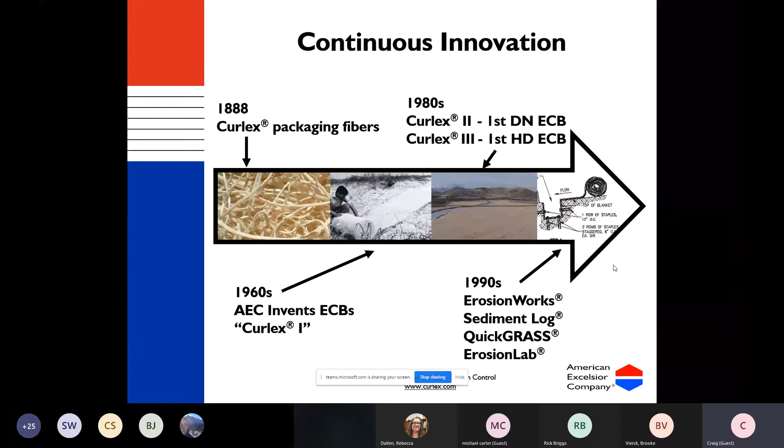We came out with Erosionworks, a free design software you can download on our website to help you make decisions about what works best in your application on slopes or in channels. We invented the sediment log, which we'll talk a lot about today, Quick Grass, our green pigmented product, and we built the Erosion Lab, the facility I run in Rice Lake, Wisconsin.

In the 2000s, we developed a new turf reinforcement mat, or TRM, called RecycleX. We don't talk a lot about that today, but it's interesting in that all of those green fibers are post-consumer waste, made from pop bottles, and they don't float, which is a really interesting characteristic for turf reinforcement mats. We invented our net-free product, the only net-free blanket of its type, and we came out with our e-staples, a biodegradable staple product.

In 2012, we came out with Curlex Blocs. This is another product we're going to talk about today. These were initially invented as an American-made alternative to coir logs for stream bank and lake bank restorations and filtering.

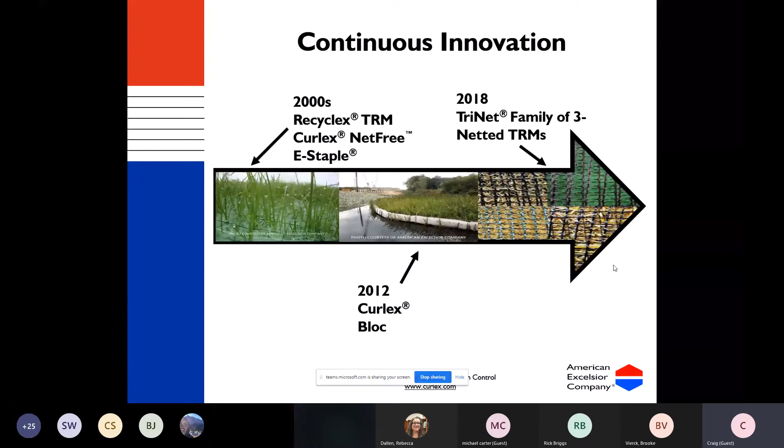And then most recently, in the 2018 timeframe, we came out with our newest group of turf reinforcement mats, called TriNet.

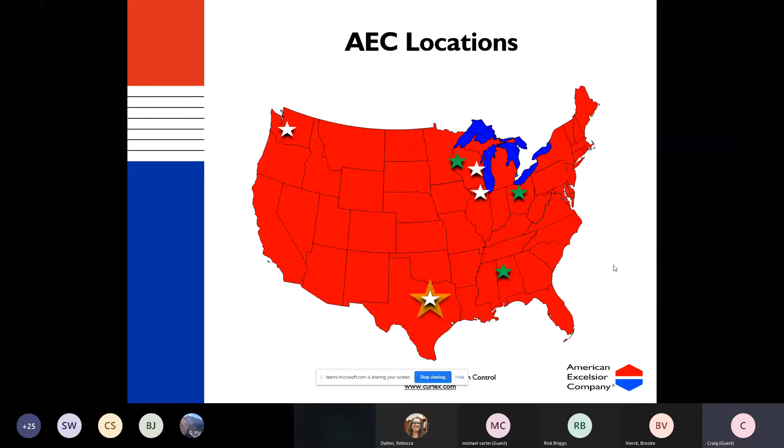So a little bit about us. I won't bore you with all the details of where we are, but our world headquarters is in Arlington, and you'll see some different stars on the map. The green stars are all erosion sediment control product manufacturing in Alabama, Michigan, and Wisconsin. Also, the facility I run is in Rice Lake, Wisconsin, and we have some other facilities there for other parts of our company. But needless to say, we're pretty diverse and have a lot of years of experience.

Well, this is where I'm lucky enough to work and spend most of my days. My friends ask me what I do for a living, and I say, well, sometimes I'm giving webinars and training, and other times I'm playing in the dirt.

At the lab, we do large-scale ASTM performance testing, research and development, contracted testing, and lots of what we do there now is what I'm in charge of: industry education seminars and internal and external training.

We always invite people if they're ever in the area. We host a lot of events up here, especially in the summertime. And this year, though we haven't hosted one yet, we're actually making plans to host again, as most people didn't last year. But it's a great, great facility.

Those are for rain simulation. We can simulate 2, 4, and 6 inch per hour rain events that simulate real rainfall, where the raindrops reach terminal velocity and have the correct distribution and size and cover. So a lot of what we'll talk about in sediment control and erosion control comes from those.

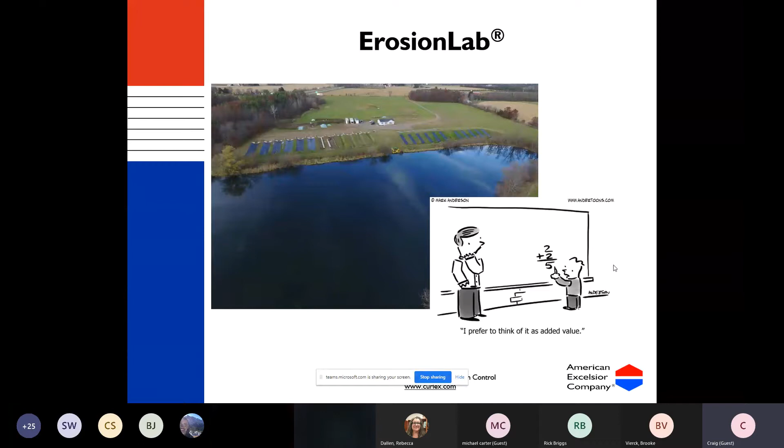And I share that, again, not as a commercial, but to let you know that we take this really, really seriously, and we try very hard to give presentations and participate in events that make our industry better. If you ever have questions or comments or want to visit, please do not hesitate to reach out to us. We'd love to have you at the facility. And as someone was saying at the beginning, it's nice to see people in person again.

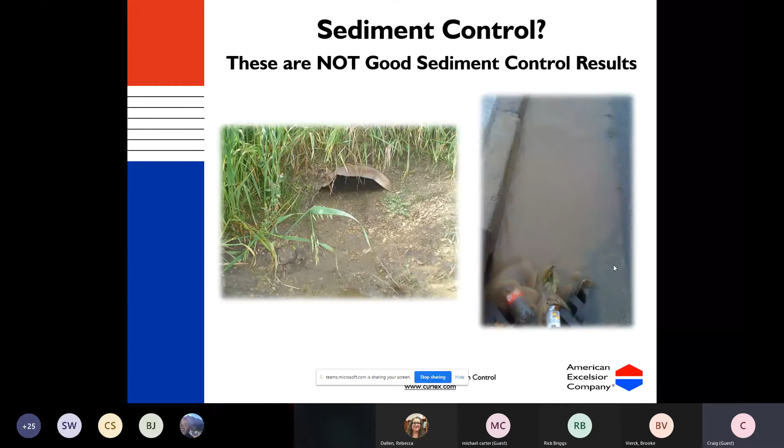And that's a lot of what we're going to talk about today. Specifically, when you put a product in these situations, whether it dams or filters the water, why does that matter? Hopefully you'll find some value in that.

So obviously there were bale checks upstream of this - you can't see them in this picture, but just up there were some bale checks, and they frankly weren't doing their job. But that's not because bale checks are inherently bad; it's just that they don't filter water. The sediment-laden water and any other pollutants come right down the stream, whether it's sediment or trash, there's a pollutant.

So what I talk about today isn't really a good or bad thing. It's just how these products perform differently, and how if you use the right best management practice, or BMP, for the right application and install it correctly, it'll generally work. But we shouldn't lump them all together and assume that just because they have a similar look, they perform in a similar manner.

You probably all know this, but I always like to say some of these basic things at the beginning. People talk about erosion and sediment control very quickly and just move past it. What we want to talk about today, though it doesn't necessarily pertain directly to your floatables, is that erosion control prevents the need for as much sediment control. Preventing the soil from breaking away in the first place minimizes the need to capture it when it breaks away.

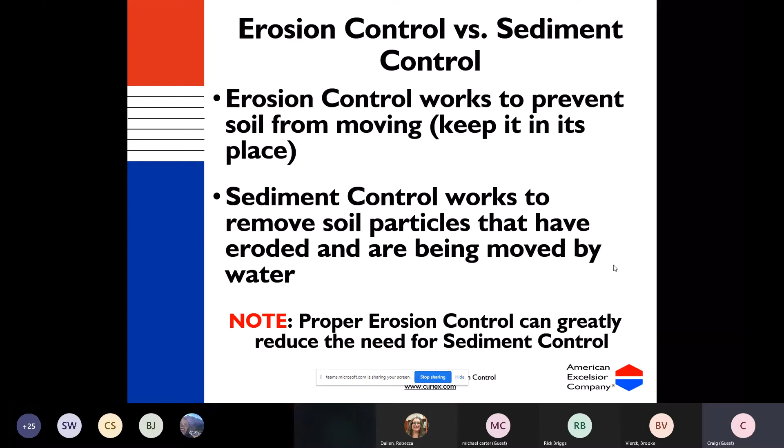So erosion control is keeping the dirt in its place, and sediment control is what we're doing to remove those soil particles that have eroded away. Basic stuff, but it's something to keep in mind.

Doing things correctly, installing some products - even if it wasn't time for erosion control, installing some sediment control products - would have caused this to look a lot different. Doesn't mean you wouldn't have had any, but we could have kept all of that trash and most, if not all, of that soil out of that ditch from clogging that pipe.

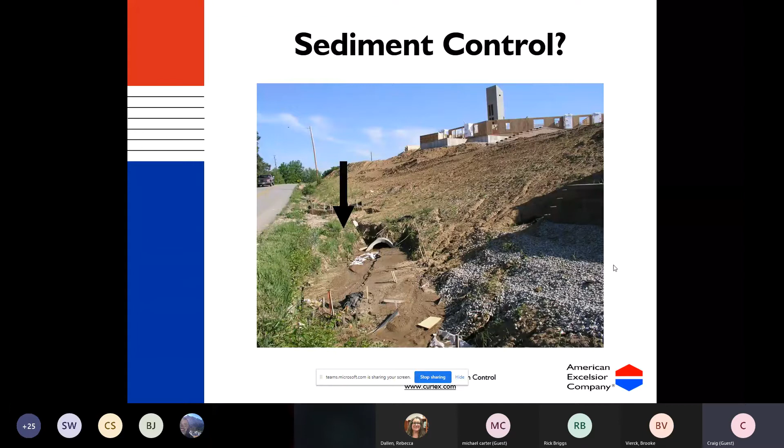So this isn't a question you have to answer out loud, but a lot of the rest of this presentation is going to talk about densities of products and whether something dams water or filters water. What I want you to consider is, does the density of a sediment control product or device affect how it performs? And the answer is yes. But why does it matter? This is what we're going to talk about.

Why does something that looks very similar - it's a tubular shaped product for instance, 12 inches in diameter - why does it matter what's inside of it? And why does it matter whether it dams the water or filters the water? And then what does that mean for you all when you're talking about waste, not only blowable trash, but the other contaminants that are coming along with that water?

So when we talk about filtering and damming products, just as a reference, we classify filtering products as those that have a flow rate of 35 gallons per minute per square foot or more. So they allow at least that much water to flow through their matrices, and they're providing some velocity dissipation when that flow rate's exceeded, and they also are capturing some sediment and waste and so forth within their matrices in many conditions. Damming products are not that, obviously. So they have a flow rate of less than 35 gallons per minute, and they're designed to pool water.

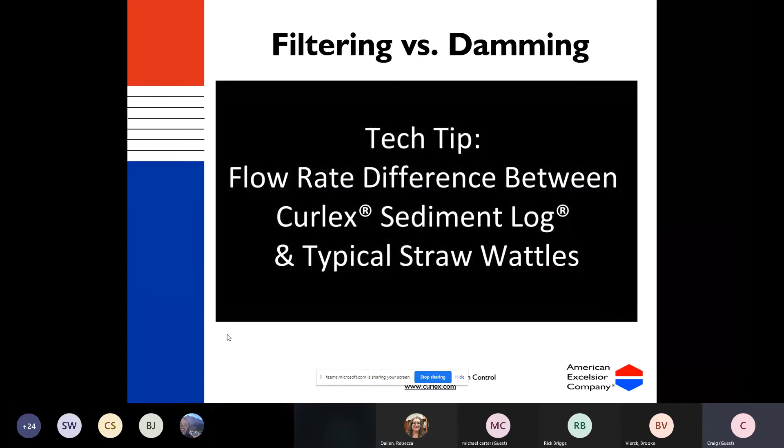So these have different end results, right? They're both looking in the sediment control world at keeping sediment under control, but they do it in very different ways. And we think there are ways that are better than others. So the world's simplest video, I just want you to look at what happens to the water when it's poured over these two products. We make both of these products. One of them is a straw wattle that I'm sure you've seen, and the other is our Curlex sediment log. So the sediment log is a filtering product, and the wattle is a damming product.

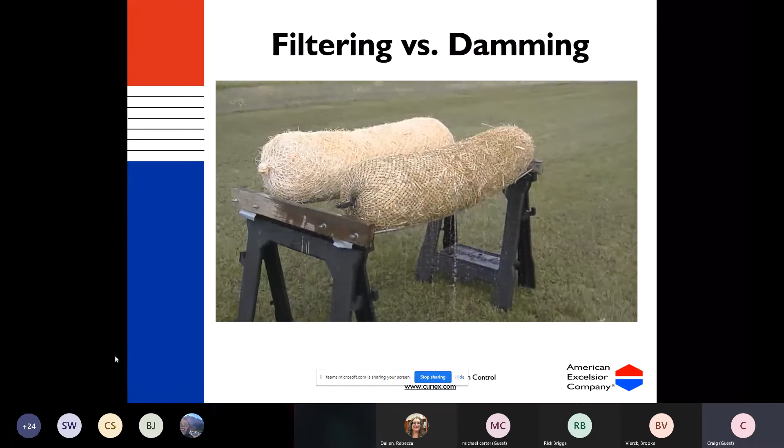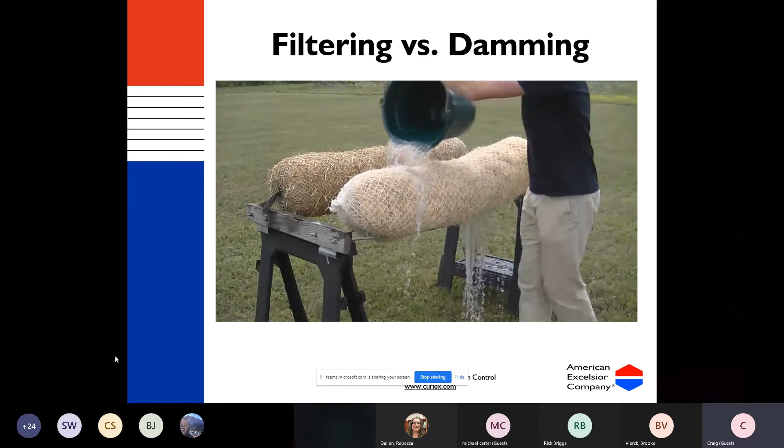So here the water goes off the sides of it. It doesn't flow through it. So these would dam the water. Same dimensions here, and see how the water flows through it. You say, well, who cares, Craig? Why does that matter? So that's what we're going to talk about next. And I think it can have some positive impacts on not only the regular sediment that you would consider the traditional dirt in your runoff, but I think it could also help with some of the trash and blowables that you all run into.

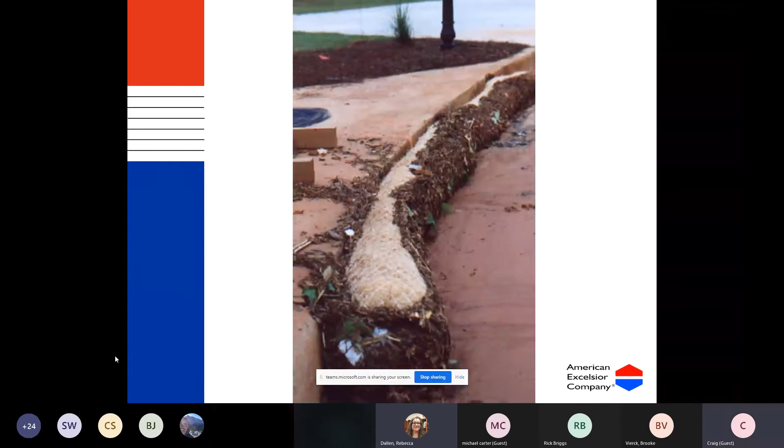Craig, we do have one question. Sure, absolutely. Michael asked this question about 2 minutes ago, so it may have been the previous slide. He says, what is the surface area being measured? So it's a square footage. If you're talking about the square foot of a product, it's how many square feet it is. Obviously, with the product it's the whole circumference. So it's the whole surface area of the device. I hope that answers the question. I'm assuming he means how much flow goes through it. So obviously a smaller diameter product is going to have more linear feet to get to a square footage than a larger diameter product. I hope that answers the question.

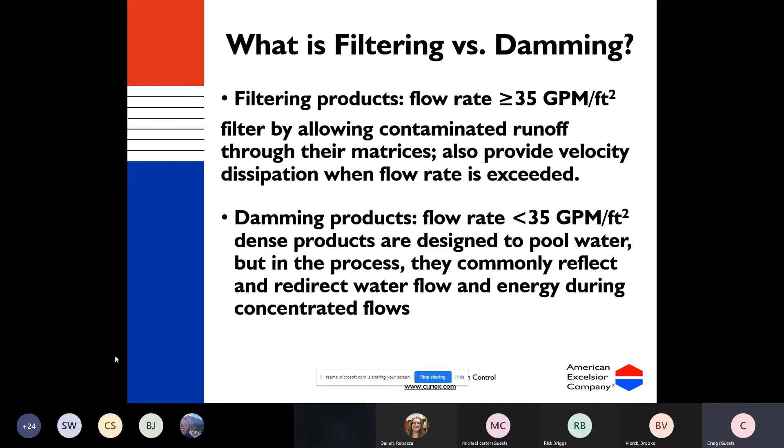He says, yes, thanks. Oh, okay. I'm not an engineer, so sometimes I try to answer and that doesn't always come out exactly how I want, but generally speaking, that's what we're talking about. Anything else? Not at this time.

Thank you. Okay, great. So as I said earlier, much of this presentation normally focuses on how filtering and damming products perform differently.

Often a log or a wattle or whatever's used, they're used with no regards to whether they dam or they filter the water, as I mentioned. And what I want you to get from today is just because two products look the same doesn't mean they perform the same. So in short, what this presentation will talk about more as we go through is how in many instances damming products are used.

And again, we make damming products. We make lots of different products. So we're not picking on a brand or anything like that. What we're trying to say is there's often, we think, opportunities for a filtering product to be used where historically a damming product can be used. So that leads us to this research.

Auburn University, as they're continuing to do, I should really update this, they're continuing to do a lot of research on this. And they talk a lot about the ditch checks commonly used on construction sites. They discovered that the inclusion of an underlay fabric reduced the potential for scour underneath the practice, thereby maintaining the interface between the practice and the channel.

And their data confirms that the dense damming products can be successful in large-scale testing conditions by creating those longer subcritical flow areas. And like I said, we're not picking on a product. We're not trying to pick on a brand. We're just saying that there are damming and there are filtering designs. And we think that damming products are often used when really the goal would imply that a filtering product would be better.

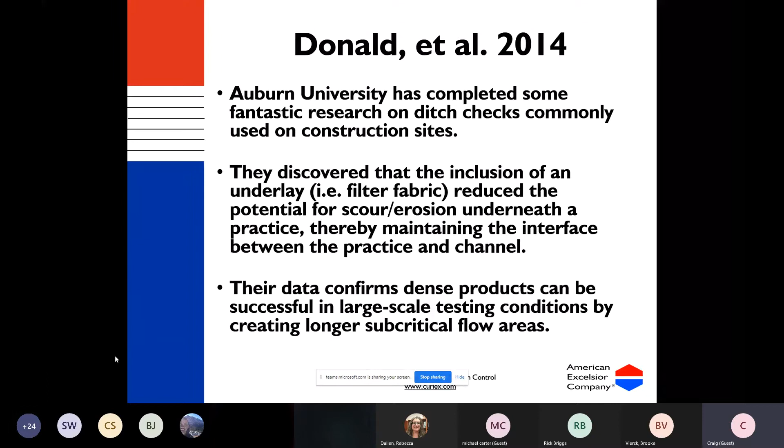So a lot of this data, again, gets back to generally, I would say, the traditional sediment control of dirt, soil particles that have broken away, which doesn't exactly get into what we're talking about with trash and blowables. But I do think it impacts how it ends up in the real world and how it ends up moving or not moving that waste around your job site.

So why do you use a damming product? Mother Nature handles natural stream erosion through a series of pools and riffles that we talked about a minute ago. The erosion commonly occurs in those faster moving water in the riffles, but the particles settle out in the deeper, slower pools that follow those riffles. So damming products are used to mimic this concept.

As I mentioned, just like it was in the street, the water hits the damming device, it blocks it up in that picture we showed a minute ago, and it pools up the water out into the street. Well, what that does is it protects the inlet, but the reason it's protecting the inlet is it's stopping all of it. It's not necessarily filtering it, and theoretically and hopefully it falls out in the street and doesn't end up in the drain. So in theory, the damming process by creating pools and riffles makes sense, but they're hard to recreate in the real world.

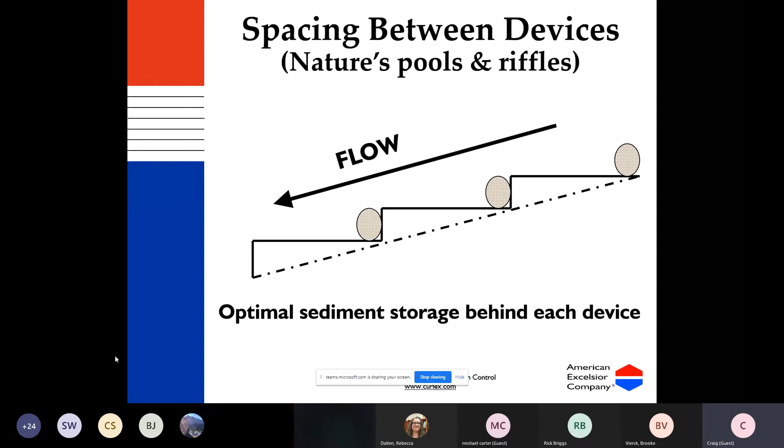There is not going to be a quiz, but I get this question from time to time when people are talking about how you space items. So it's just that to set the top elevation of the down gradient device at the bottom elevation of the up gradient device. So this isn't something you're going to get into in streets, but this is something in a channelized flow application, how we determine the spacing between the units.

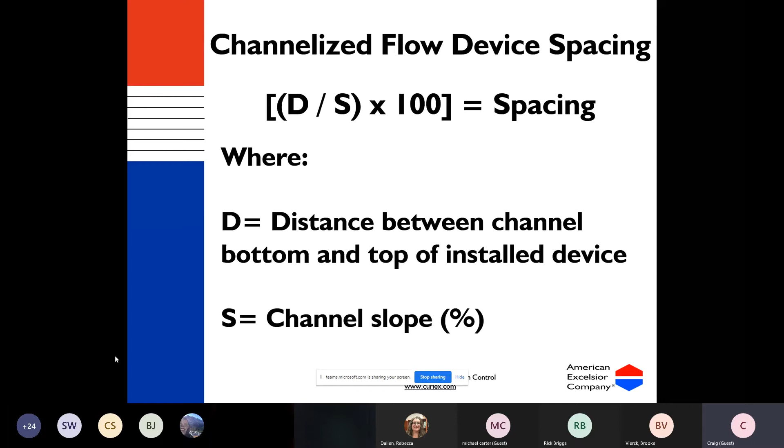So damming products build up hydrostatic pressure as depth increases. This is not hard to understand, right? And this buildup of energy can be the cause of scour under or around a damming device before ponding and overtopping occurs. So if all other things are equal, except for the depth of the water, there's more downward force in front of the device the deeper the water gets.

So this is the old thing you've seen. It doesn't matter whether it's on asphalt or dirt or what it's on. If you dam water, the more water builds up, the more pressure there is, and water, as it does, finds the weakest point and tries to break through. The term we use in the Midwest here a lot is blowout. When blowout occurs, it's because the device couldn't withstand that pressure.

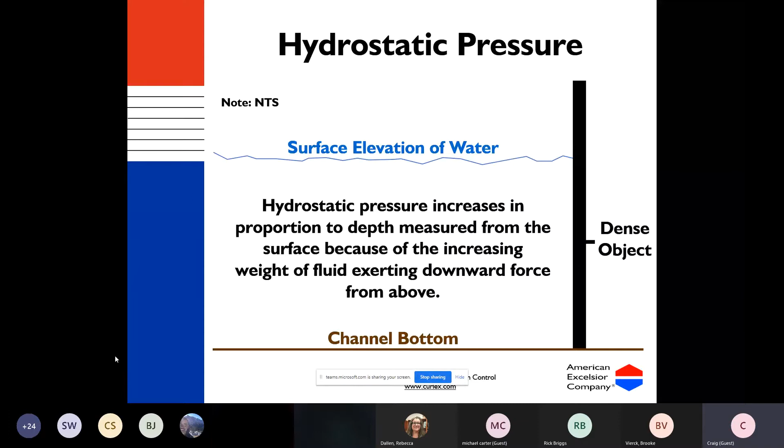So we're going to talk about where they blow out. And then, of course, this is where your sediment goes when they blow out, or this is where your trash flows to. So we're wanting to prevent that. So this simple figure illustrates what can happen as a result of increased hydrostatic pressure caused by ponded water.

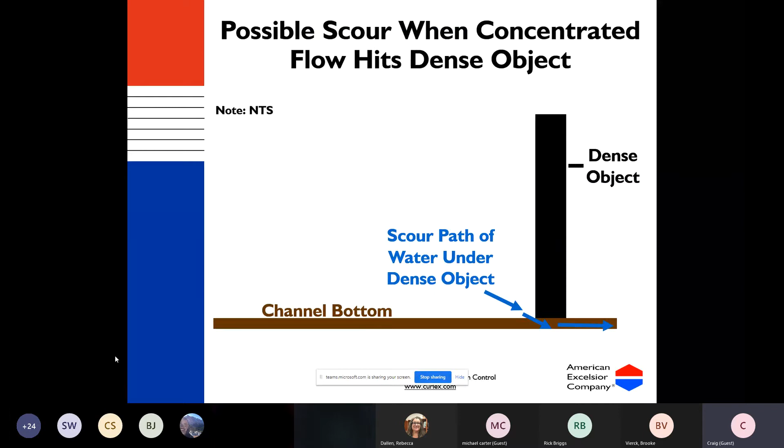So in a road outside of an inlet, right, there's no dirt. There's no interface in that regard, but there is a product sitting on top of the concrete or the asphalt. Well, sometimes those products don't work super well there because in the case of a straw wattle, for example, most manufacturers recommend that you trench out a little area for the straw wattle to sit into. If you look at their CAD drawings, that's what most of them recommend. And that's because they need it to have that intimate soil contact and they want it buried just a little bit. With sediment logs like we make on the filtering products, we don't need to dig a trench underneath them. Under our wattles, you do.

So when the water's building up, the pressure often builds so much that, like in this picture, it blows out underneath, right? This was trenched in. This was done on one of our rain slopes. That's one of our products. Water pressure built up. It couldn't withstand it any longer and went underneath there. So that's where the plastic bags are going to go. It's where the sediment's going to go. It's where anything is going to go with that water path. And as you all know, it just continues to get worse and worse over the course of an event.

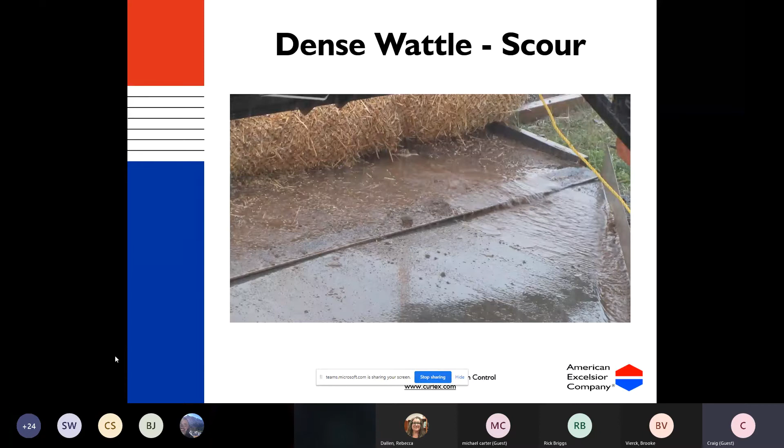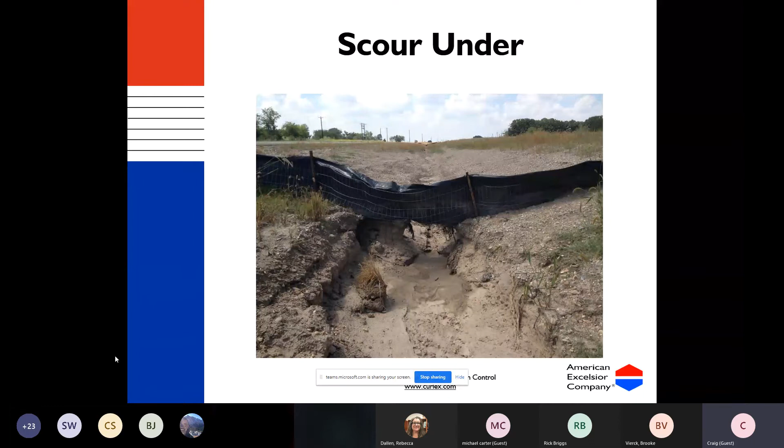And I also ask you to look off into the distance. There's no vegetation. And the reason there's no vegetation is because it was all killed. It all died from the ponded water behind it. So these are other things that we have to concern ourselves with. And of course, any waste, whether again, sediment, trash, whatever, just followed this and blew on down this ditch.

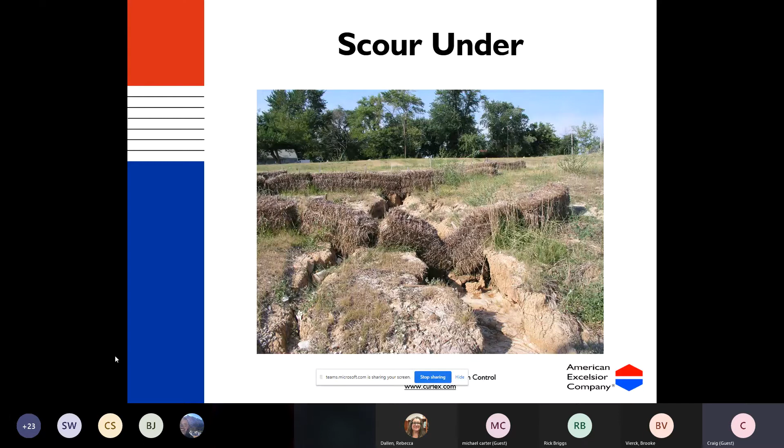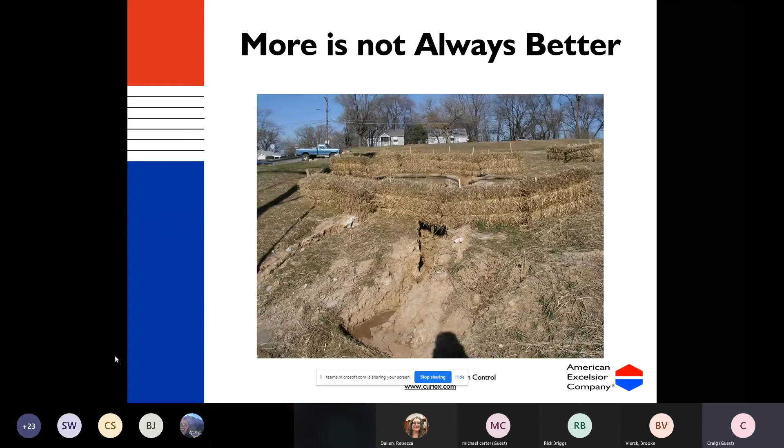So more is not always better, you know. We said, well, we had a few straw bales, let's add more. Well, the same thing's going to happen. In most cases, it doesn't help much. It just wasn't the best management practice for this job.

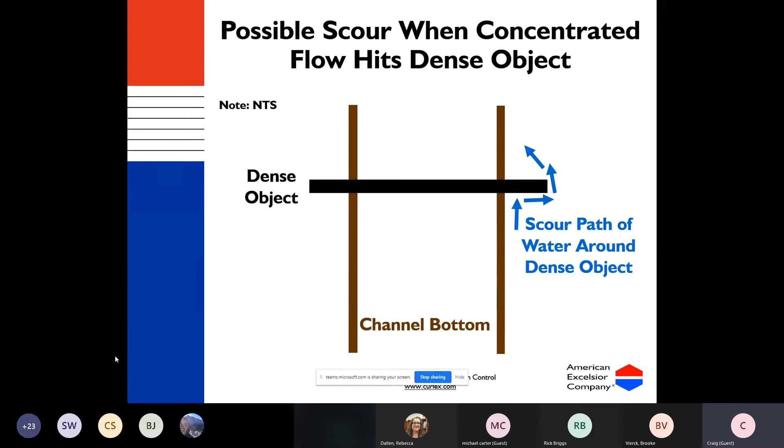So people say, well, I used an underlayment fabric, or I used this really great installation technique, and I don't generally get blowouts underneath, and that's fine. But what's the next way we see these not working in the scour? It tends to be around the damming devices. So the water depth increases, obviously, over time. And if the installations aren't wide enough, the flowing water can scour around the sides. Generally speaking, as a rule of thumb, scour around a product can generally be stopped by installing the product about 3 feet above the normal pool on both sides.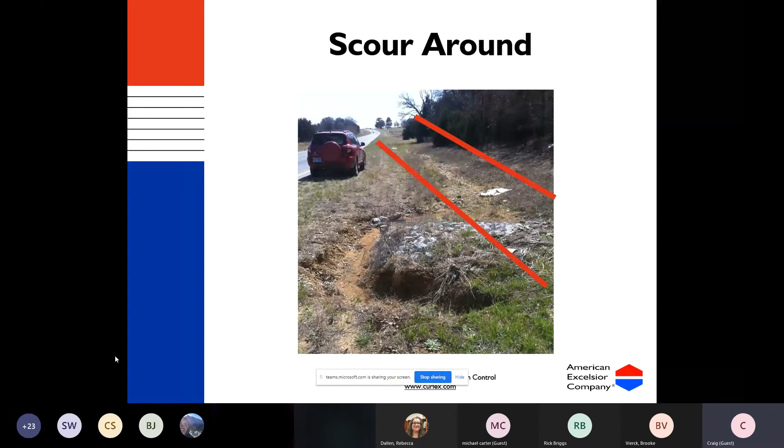There's plastic and a bunch of trash down here. When we pulled over, there were two concerns. One was the blowout and the lack of vegetation, and the other was the waste and stuff that had broken down. You can't really see it, but way off in the distance where there's a shadow, it drops down into a little creek right there. So obviously this is what they wanted, headed towards the creek.

So just as a reminder, this is, I think, a pretty good example of installing over the normal pool. This was a really wide ditch, so they had room to install this the proper way. This happens to be a Curlex sediment log.

I always like to say about this picture, one thing interesting about sediment logs and a lot of sediment control devices that filter, pay attention to your CAD files. With things like straw wattles that we make, the design tells you to drive the stakes through the center of the device. But with a lot of products like Curlex sediment logs, you actually put the stakes through just the netting on the downstream side. The reason is you want those fibers to expand and open up and allow that filter through the matrix. So just an interesting side note.

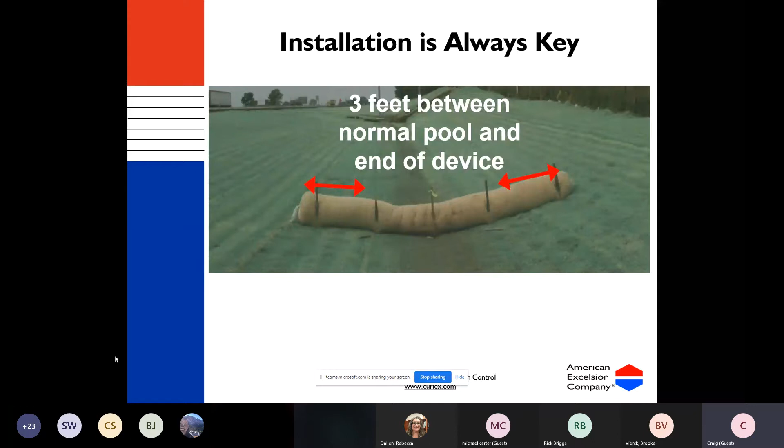Do we have another question? Yes, Michael asks another question: what is the longest a filter log can last, and are they reusable? Michael, you must follow me, because I get this question every time and I never probably give a great answer.

So we have had sediment logs last months, and we've had sediment logs last days. Probably days is maybe short. In really extreme situations where there's no erosion control and a high sediment load, it is possible that a sediment log, depending on how many there are and so forth, could fill up in an event or two. They can. There'll be some pictures here in a little bit. You'll see them. They hold up pretty well, pretty far into their design life. So I would say probably on the short side, weeks.

We do have a product out that is reusable, that comes in a really durable, high vis kind of wrap. It's a product designed to be used as perimeter control. We call them a high vis wattle. They are meant to be reused. The standard Curlex logs are generally not reused.

We'll talk about netting here in a little bit, but just a little precursor to that: the logs and the blocks have two wrap options. One of them is a degradable poly wrap mesh, and the other wrap is 100% cotton. We'll talk about those in a little bit, but in those regards, generally speaking, they're not reused.

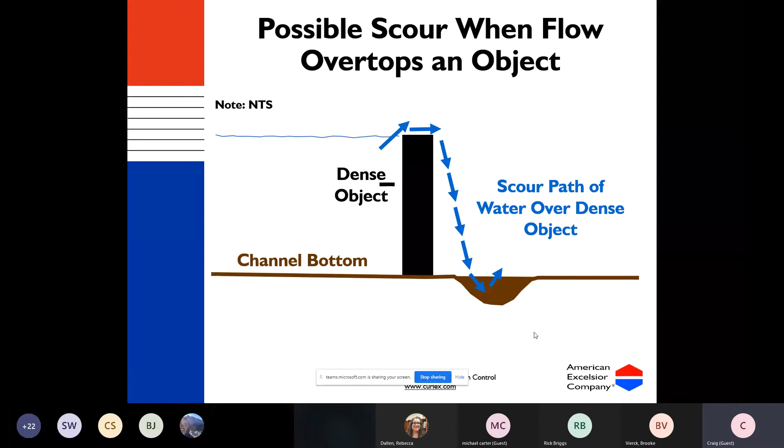The plunge pool at the bottom of a waterfall is basically the same phenomena. When it overtops, this is what happens. As the potential energy of the water increases, as that water depth increases and its position is increased relative to the bottom.

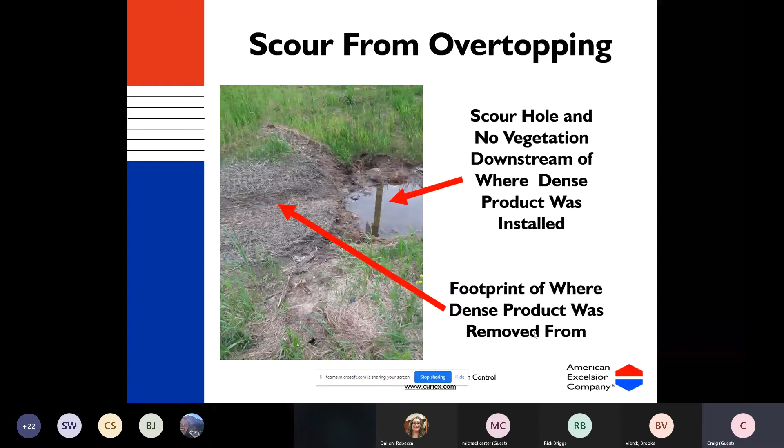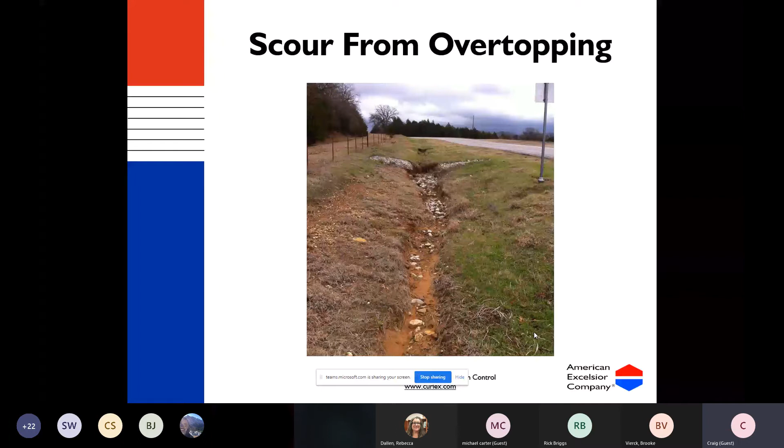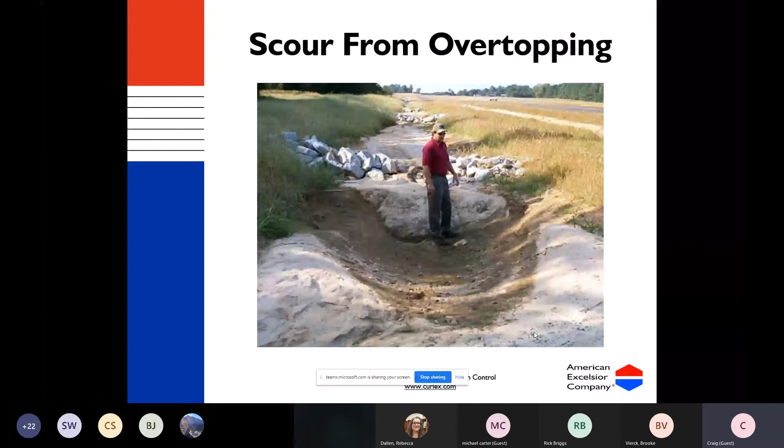We mentioned earlier the Auburn research, and others have done similar work, requiring underlayment fabric when you're using sediment control devices that pond water. The thing to keep in mind, though, is vegetation doesn't grow where the fabric's placed, and those unvegetated areas are now unprotected, creating a situation where erosion can happen. So it's something you'll have to address if you're going to use a damming product. We believe, from our research at the lab and in the field, that the underlayment fabric method is an acceptable method in temporary erosion control applications when vegetation isn't really the goal of the project, or at least not at that point of the project.

Vegetation is one of the greatest tools in Mother Nature's toolbox, and it works really well in a broad range of erosion and sediment control applications. I was just on some vegetated waterways in Wisconsin two weeks ago. I'm not sure how much of that's being done in Oklahoma right now, but in Wisconsin it's a huge movement to get farmers to put in these vegetated waterways, and there are a lot of really great reasons to do it. In addition to preventing erosion, those vegetated waterways have cooler water temperatures - the water coming out of them is much cooler relative to water crossing pavement or riprap. And they're safer, frankly - you can drive across them, and in many instances they're even mowing these channels. So there are some great reasons to get Mother Nature and vegetation back in play.

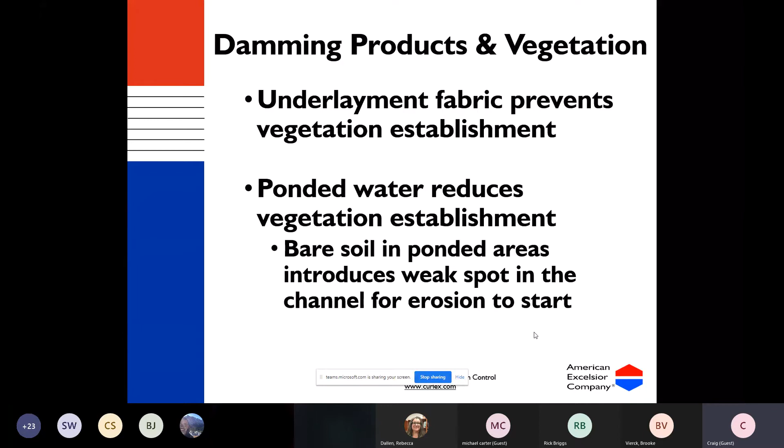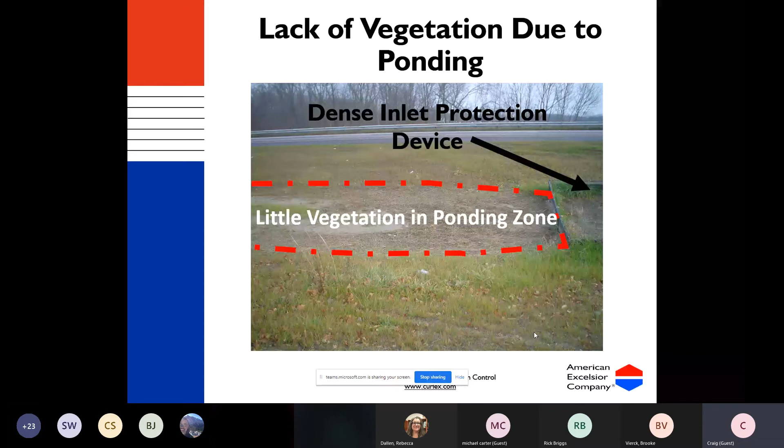The red dash line in the photo, just reiterating some of the things we've talked about. That damming device sitting there is an inlet protection device. I believe this is the one where it's kind of a silt fence type fabric wrapped around a frame. It held up really well, right? It was designed well, designed to hold it. It looked like it overtopped some. The problem with this picture is, while it did protect the inlet device, the water stayed here so long that all the vegetation was drowned out. They obviously did a good job of planting, you can see vegetation growing everywhere else, but this is a concern, and it introduces this other weak spot. So this is something that's going to have to be resolved. Maybe with the choice of a filtering product, you might have had different results.

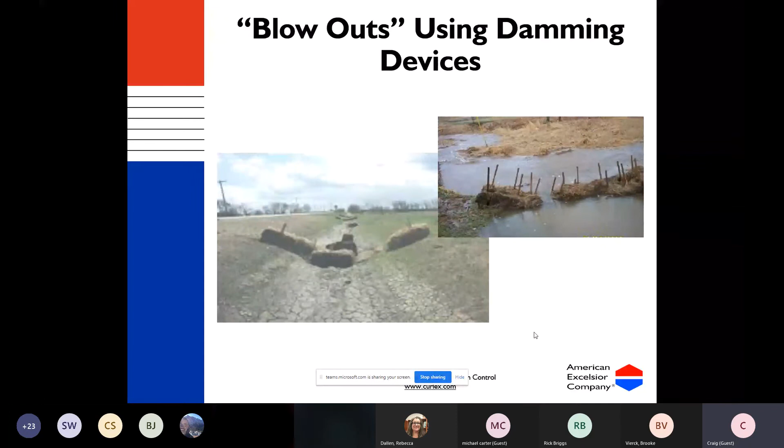So blowouts, we've talked about these. Again, it's just an example. I don't recommend hay or straw bales on anything except for hay rack rides, but they just don't hold up.

Generally speaking, our research and testing says that damming products may be suitable for temporary channels where vegetation is not necessarily desired. But our research indicates that the basic concept of ponding water should not be used in channels that incorporate vegetation as a permanent component of the solution. Dense damming products have been shown to work really well in the field in sheet flow applications when properly installed. Again, nothing's perfect, nothing works in every application. We make both of these kinds of products. I think filtering products have more applications than people think about initially, and we'll talk about those next.

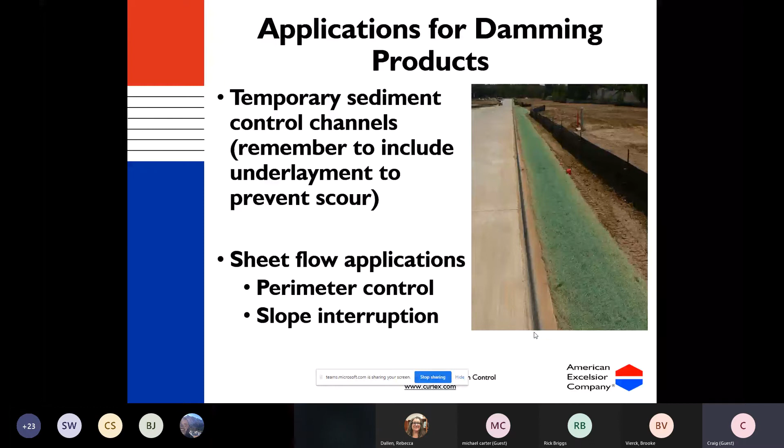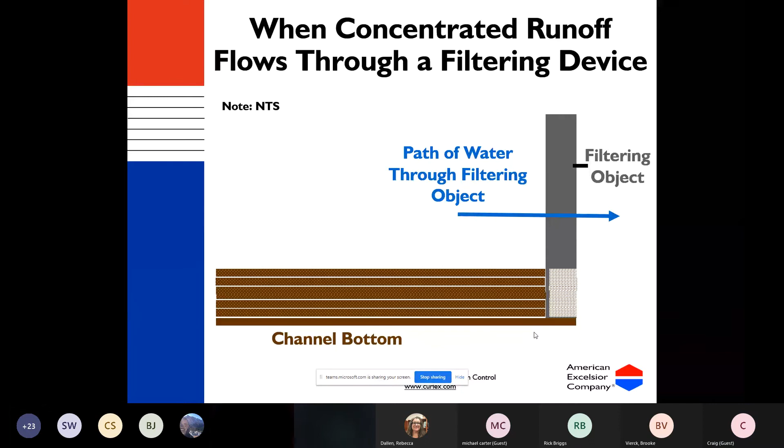So what happens when runoff in a concentrated flow hits a filtering device? Don't laugh too hard at my high dollar visuals here, but as the water flows through the device, the velocity is dissipated. When the flow rate is exceeded, sediment begins to accumulate on the upgradient side of the filtering device. In some cases it will still accumulate on the back side, but it also accumulates within the matrix. Sediment and other contaminants are retained within the matrix as filtered water comes out the other side. So the question earlier about life, I don't know how long this product had been installed. I should look this picture up, but it was well into its design life.

This particular product had the degradable poly wrap on it. It had been there for quite a while. There was a lot of sediment, leaves, you can see there. There's a lot of stuff hitting this, but we were still getting really clean water coming through it. It was probably nearing its end, but it's still cleaning the water. As long as clean water is coming out, as long as you're not blocking it up so far behind because it was so full of sediment, it's still doing its job.

And then, of course, you're reducing velocity. What we see in the field is, like you saw in that inlet protection, if there is waste, the waste tends to fall in behind these sediment devices because they're following the flow of water. The water goes into the sediment control device, and the plastic cup or the can or the bag tend to pile up on the back of these.

Again, good question earlier about functional longevity. Sometimes the functional longevity can be increased. People can go by and just do a little bit of a clean out along the back edges of these, and that's actually what we've been told in the field. Rebecca, I think you and I talked about this the other day. People are telling us that it makes cleanup a lot easier because they just go to the sediment control device and pick up the trash off of them. Many times the product's still usable after that. So this is a good example of that.

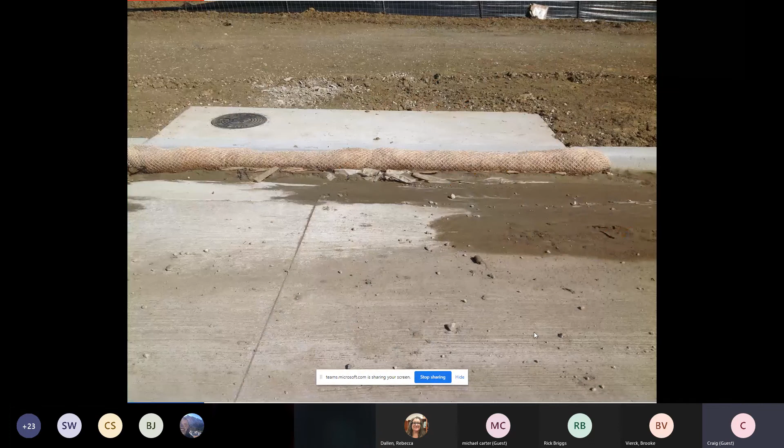So this was a job site. You can see there was some silt fence still being used in the background. This product, to the right side of the picture, it looks like there was actually a little bit of sediment that had backed up quite a ways. But this big event put a lot of sediment through there.

You can see that about three-quarters of the way up on that log, you can still see the brownish line on it. The water was up almost to there, so it captured a lot of sediment and allowed the waste and stuff to pile up in front of it. Again, we've been told these are really easy to clean up and clean around. The rest of that trash didn't go down the street because the water wasn't rushing down the street like a river—it was still going into the sewers as it should, but it was going in clean. So why does this work?

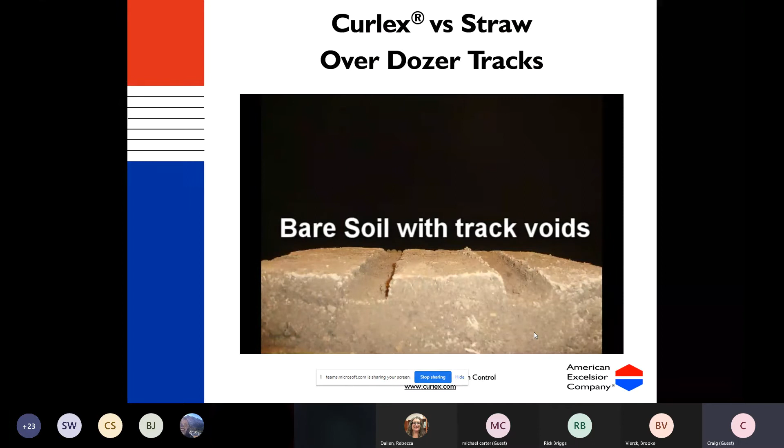This is a time lapse of one of our straw blankets and a piece of our Curlex—these are both our products. This is what happens when these Curlex Excelsior fibers get wet. Whether they're in a blanket or a log, they expand, and then the opposite happens when they dry—they shrink back down a little bit. So when they're increasing in size...

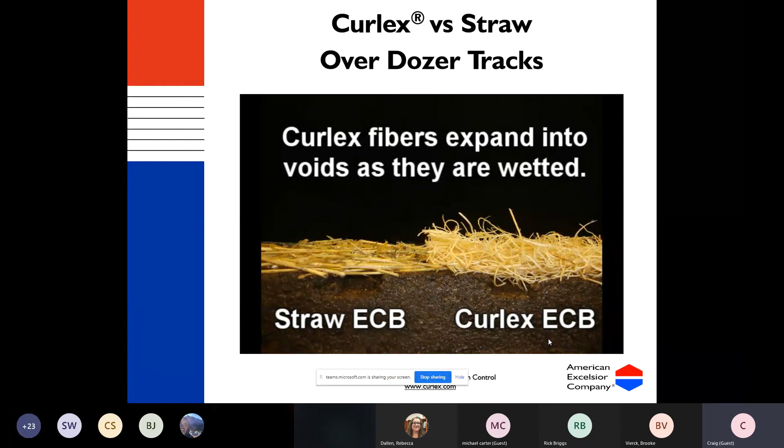Excuse me, I have hiccups. All of a sudden the Manning's n, or roughness factor, of them in blankets increases, so we're capturing sediment and so forth even in a blanket form. The logs, which are designed to filter water, kind of open up but allow that water to flow through and capture sediment within them. Again, it's not picking on straw—that's our blanket on the left. They just don't expand and contract like Curlex does.

People ask what they look like when they take them out. This is really fine clay, which I know you all have some experience with—that stuff's hard to capture, but these sediment logs do a tremendous job capturing that in the field. These are some that are broken up. We'll talk a little bit about this as we end the presentation here, but people always ask, well, what does your product do in regards to waste?

So unlike silt fence, where you have to throw it in the dump and you're throwing away a bunch of plastic—again, I'm not picking on it—if you buy our all-natural wrapped product, you're not throwing away any plastic. They're natural wood fibers and cotton netting. There are many instances in the field, especially in rural areas, where they were installed with wooden stakes, and we have installations where they don't even take them out. But when they do take them out, there's no plastics—we're not adding any plastics to the environment or to the landfill.

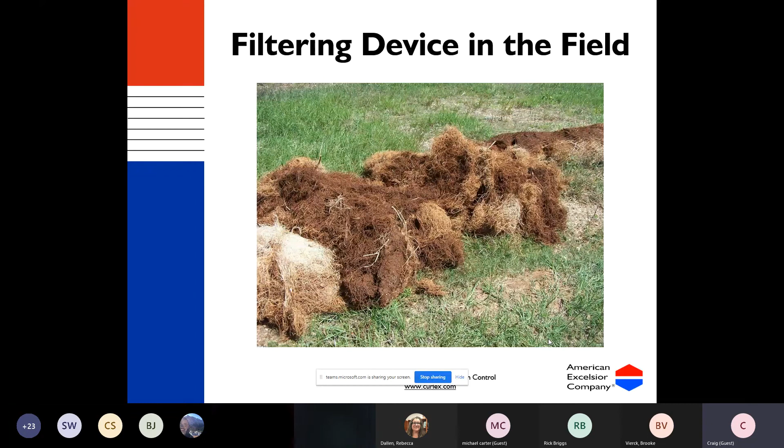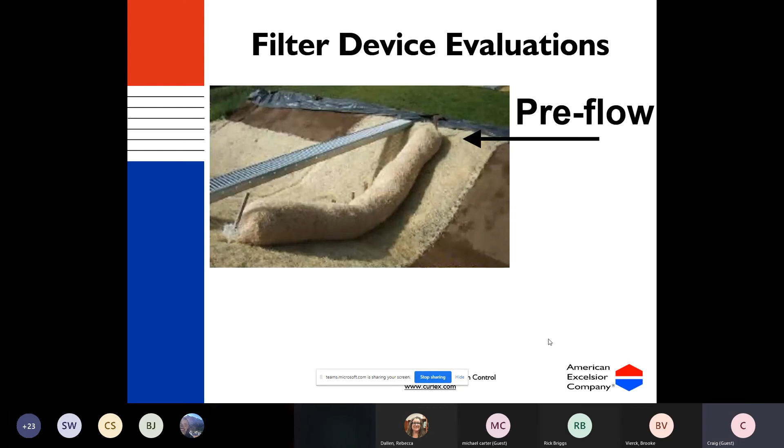So this is a pretty common example of what they look like after their functional longevity has come to an end. We've done a lot of filtering device evaluations, and I put these pictures in here so you can imagine—again, I know we talk a lot about sediment here, but the trash is going to do the same thing. This is one of our 80-foot long trapezoidal channels at our test facility in Rice Lake at the Erosion Lab.

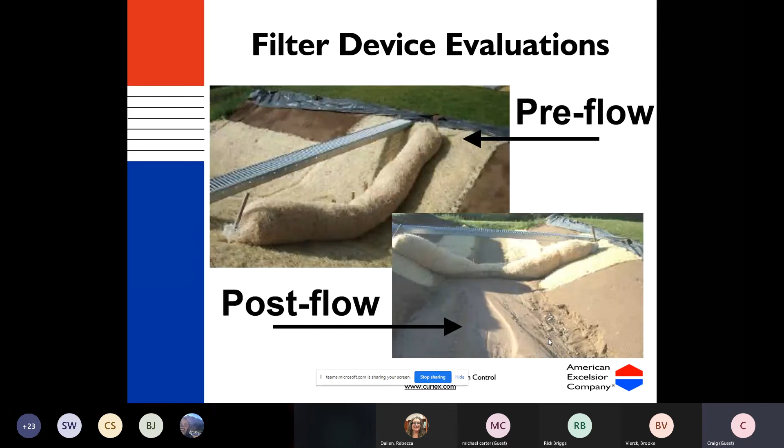So uphill, we ran a tremendous amount of water down an unprotected channel and hit this sediment log and blanket installation to see how it would hold up to this huge flow. We did have clear water coming out the back, but we hit it with a lot of dirt on the uphill side—this is what happens in the field, right? A pretty similar shot, but this is actually in real life. They obviously hadn't gotten to put down erosion control yet. This was pretty severe, probably one of the more severe ones I'd ever seen, but generally speaking the channel held up.

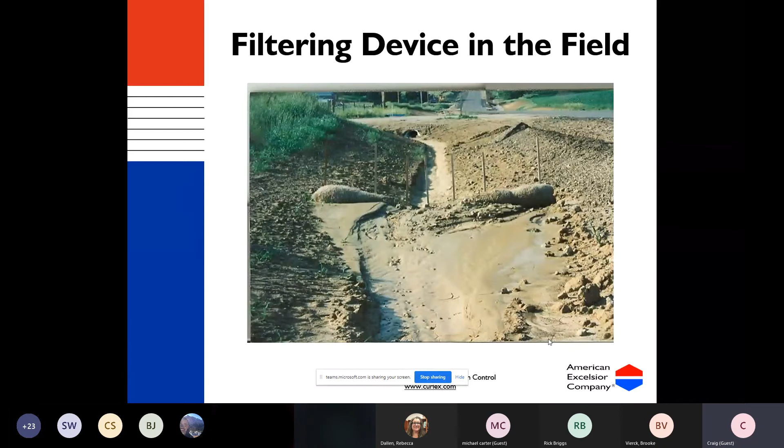It's going to need a little rework, but it's not like it would have been if we would have dammed that up and those would have blown out. So again, still going to require some rework, but we think it's the better choice. This is what we want to see—you can see in the very bottom front of the picture the grass that was pushed up on these sediment logs, so there were some pretty high flows to this channel. You can't tell that now, but there were some pretty high flows.

And this is what we want to see. The water was going away from us in this picture, and you can see that it filtered—it did a good job. Vegetation wasn't drowned out.

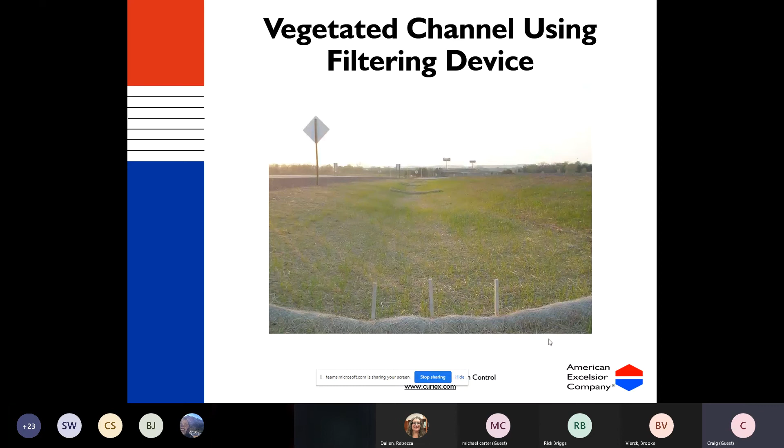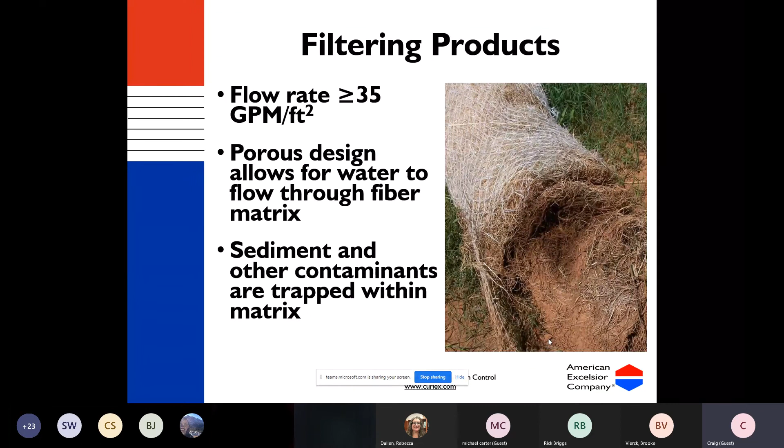And this is what we're hoping to see at all the applications. We've talked about all this. I know we're running out of time, but just as a reminder, filtering products are more than 35 gallons per minute per square foot, and the porous designs allow the water to flow through the matrix and capture sediment either within it or upstream.

A little side note, I know we were talking about blowables and trash, but I thought you'd find it interesting that Curlex fibers, these Curlex Blocs, about the size of a bale of hay, were designed to be an American-made alternative to coir logs. And we did a fly ash test.

If you know anything about fly ash, there are lots of reasons to get this stuff out of the water. We set this up in one of our channels, pre-mixed fly ash, and these were the highest results we had seen as far as reduction of NTUs, with no flocculants used in this. We had almost a 95% reduction in total suspended solids of fly ash.

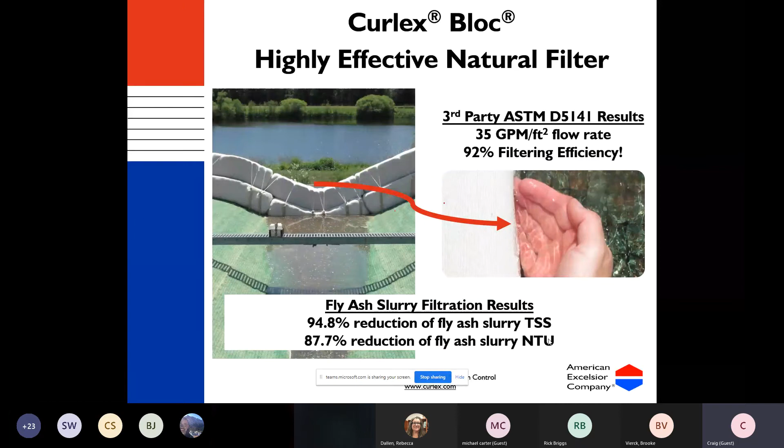So again, in this application, if this was in the real world, the sediments are being stopped or trapped within the matrix, as well as other contaminants, hopefully allowing you to pick up any other waste and so forth that would accumulate along these sorts of stations.

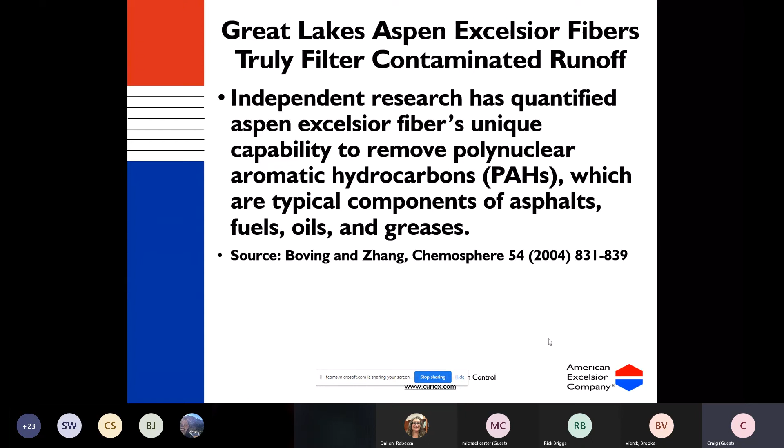Another thing we get asked a lot about is what other contaminants. There's a lot of contaminants we don't see, right? Anything made with a Curlex fiber, a Curlex Excelsior fiber, is listed on the EPA as an approved sorbent for oils and greases. So when you're specifying something with Curlex fibers, you're specifying something that helps remove PAHs, which are those typical components of asphalts, fuels, oils, and greases. It's a nice added benefit.

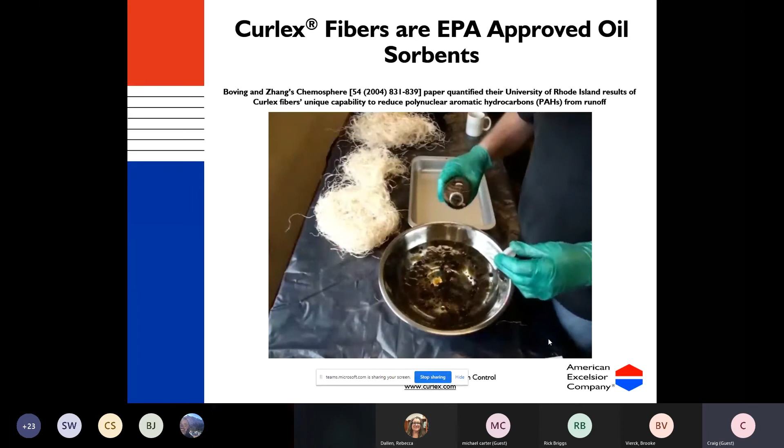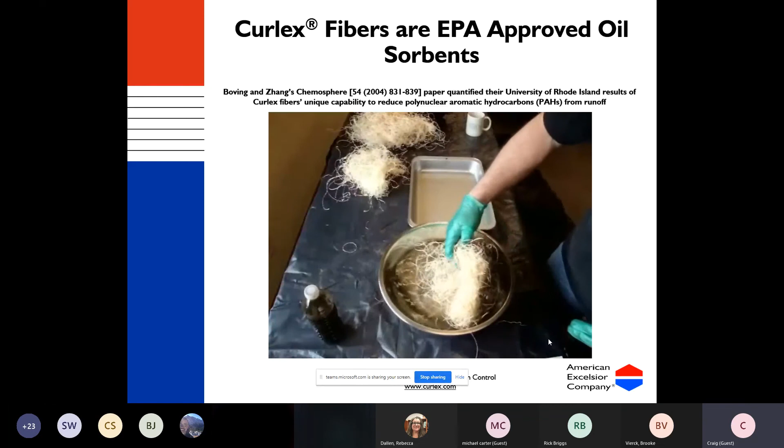Just some short little videos here, but these are just Curlex fibers, nothing special about them. Dirty motor oil in water, and just a way to show you how quickly it grabs hold of that oil. Keep in mind, those fibers can and will grab that oil. Does a really nice job—a little added benefit that other fibers aren't designed to do.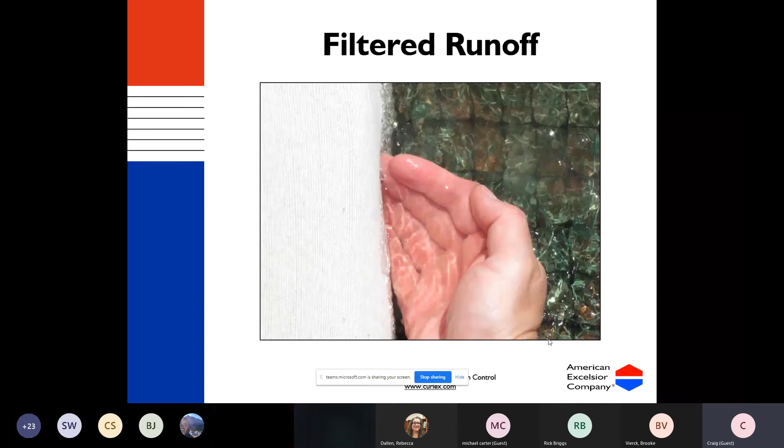So this is the end game, right? Clear water, whether it's keeping sediment or trash or whatever out of the system. This is what we're trying to do. As I mentioned, what happens to the Curlex logs and blocks—the fiber is all natural, it's not a food source, it's not a byproduct, so it's completely safe.

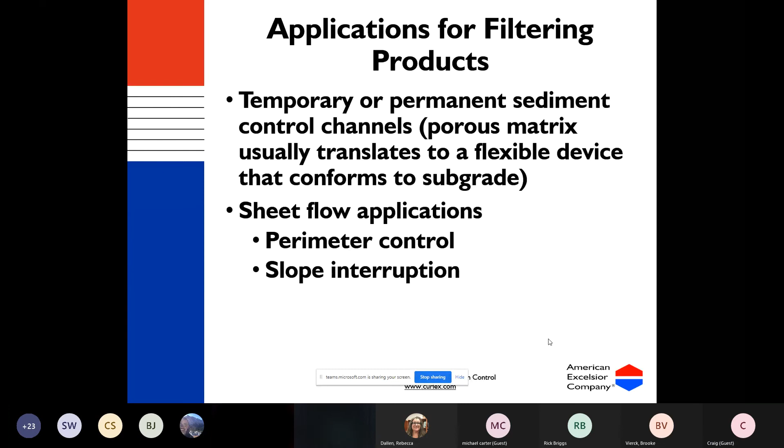The netting can be degradable or 100% natural, and in some instances they are left in place, and you can confidently say you're not adding any plastics to the landfill. I've hit all this, so I'll stop now, but I want to say how much I appreciate your time. I hope this has been educational, and I'd love to answer any questions you might have that Jeff probably hasn't already answered for me.

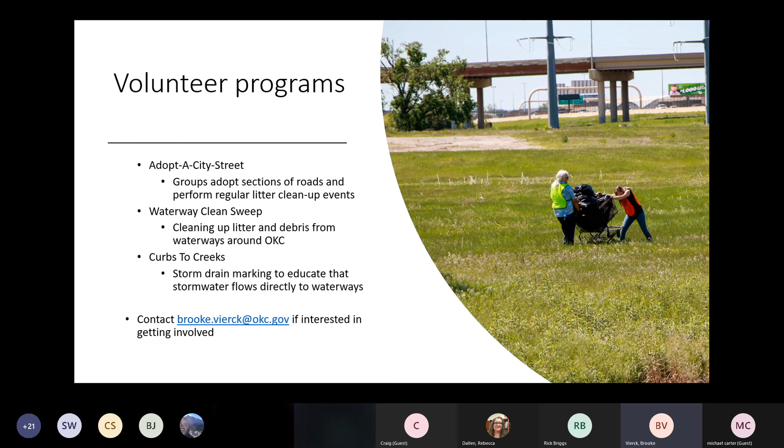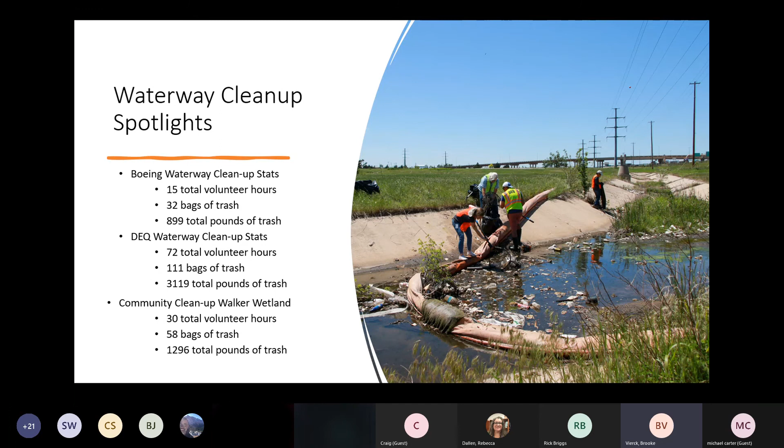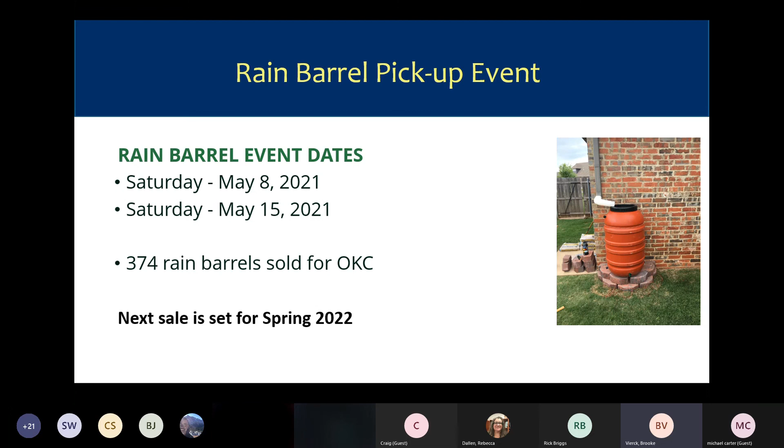We did hold our rain barrel pickup event on May 8th and May 15th. We distributed over 374 rain barrels for OKC, and it actually ended up being over 900 rain barrels for the total OKC metro between Norman, Yukon, Midwest City, Edmond, Mustang, and OKC, and I may be missing a couple as well, but over 900 metro wide.

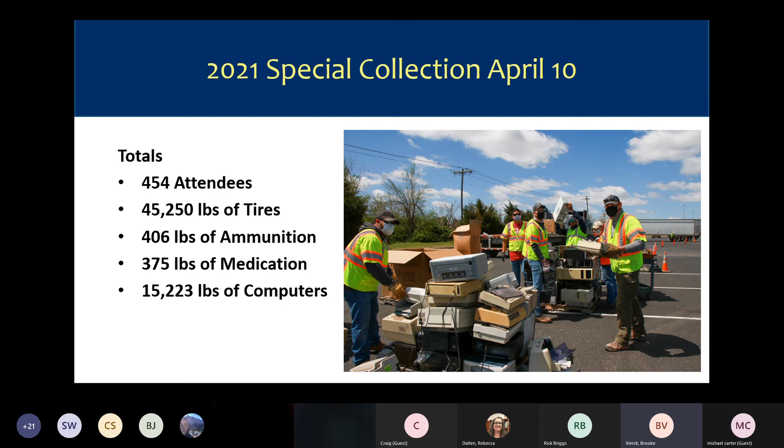This was the numbers from our special collection event. So we did have about 454 residents come through to participate in the program, with lots of tires, ammunition, medication, and computers that were collected. So those are some of the numbers if you're interested. And then again, if you're interested in setting up a volunteer opportunity, feel free to reach out to me. We can get something set up for your organization, and we can kind of mold it to what your needs are. So feel free to contact me if you're interested.